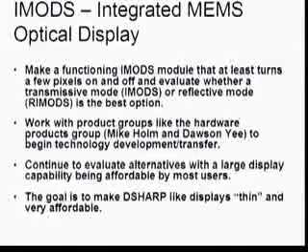And then the key after this is to tile them seamlessly, and that again is an optics problem. And rather than getting into that, I'm just going to point at Gary and say, ask him. He'll tell you how to do it. It's not insurmountable. So this is a new approach. It's as much an economic model as it is a technological model.

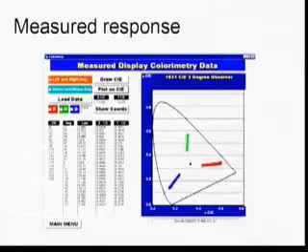You can't trust what people tell you. You have to go back to ground truth. Again, looking at the hardware, picking the hardware to pieces, getting into the internals of the hardware, that's what we do. That's part of our job. We were very lucky. There's other things that people don't realize about currently available display devices.

Until you measure it, you might assume that the gamut of the display is constant across all brightness levels. It's not. Here you see the gamut migrates to a smaller region as the brightness increases or decreases. This is actually, I think, with angle. Oh, I'm sorry, with angle. Right, this is not the brightness variation, it's the angle variation. The gamut shifts as a function of angle on these.

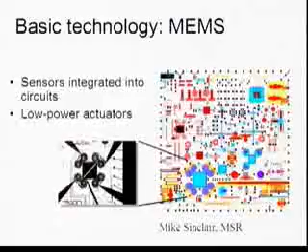It's something that we have no way of compensating for, by the way. We don't track the viewing angle; it's an unsolved problem as to how to optimally compensate for a wider range of viewing angle. But at least we know that there is this variation that has to be dealt with. It's very valuable to be able to get at the ground truth on that.

Now I want to go back to Anandan's questions. Portrait display devices are becoming more and more fashionable these days. So the question is how does ClearType deal with portrait mode displays where the stripes in the LCD pattern become horizontal instead of vertical? You can still use it. It doesn't give you quite the benefit that you would expect on Roman text, which is dominated by vertical stripes. But you can still use it, and you still get some increase in apparent resolution.

And it looks a lot better if you anti-alias than if you don't anti-alias. And one of the benefits of ClearType has been to focus attention on the quality of the anti-aliasing, not just on the displacement of the filters. So I'll give you a quick answer. If you have an option of turning ClearType on or off in a portrait mode display, turn it on.

Even for the rotatable stuff, although it may be different tuning. There is tuning available. The tablet people have a different set of parameters to use in that mode. Now, whether they account for being able to rotate dynamically, I don't know. You'll have to talk to them.

Okay, so this is phase 2. I'm trying to transition from the display devices into the mechanisms that can be used in display devices. MEMS are not just for display devices. They found a tremendous amount of application in display devices in their early use, but there are all kinds of ways to use it. This is a basic technology. It's a lot like when transistors came out, people didn't say, oh, this is all about radios, or hi-fi, or missile guidance units. Transistors are basic technology. That's the way you actually build electronics.

Now, there's another way of doing this, which is a little closer to the standard type of silicon processing that we're used to. Keep that example in the upper right in mind and think in terms of this region right around the hub, because we're going to go through some detail on the steps that are necessary to build this. So, number one, you start with a silicon wafer. This is standard, monocrystalline silicon that you use for any kind of IC fabrication. In fact, the steps we're talking about are precisely IC fabrication steps. It's just we're going to do some funny stuff in the middle.

So the first thing you do is you put on an oxide layer. Again, you just sit there and diffuse, turn up the heat, put in a little bit of gas, let it diffuse in for a while, build up this first oxide layer, take it out. You can etch that oxide layer, same old lithography steps that you would use anywhere. Again, this projector is showing it and this projector isn't.

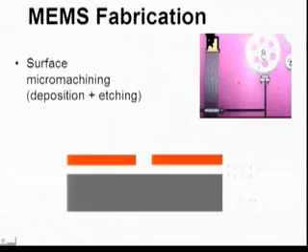Next step, go in and deposit polysilicon. This is not the monocrystalline substrate. This is a standard amorphous silicon layer on top. You deposit that. Notice that the deposition is conformal, that it doesn't exactly give you a layer that goes straight across. It actually dips down into the holes that you created in the previous step. You can etch that. Again, same type of photo etching that we do in standard CMOS processing.

Next step, go in for second oxide layer. Since this is the diffusion process, Mike will have to explain to me as well as you why it's conformal. But assume for the minute that it is, and again, you might not care, so we'll just gloss over that and go to the next step where we etch through all the way to the bottom, which is legal in this process, I think. Okay. There are rules you have to follow, by the way. If you're really clever, you can break the rules. Mike breaks the rules.

Last thing you do, well, not last thing you do. Next thing you do is lay down another layer of polysilicon. This again is conformal, and you can see it really gets down into that. It goes all the way down to the base silicon layer to form a post. Etch away. Now, what you end up with is a bunch of layers of oxide and polysilicon, just like you would in any CMOS process.

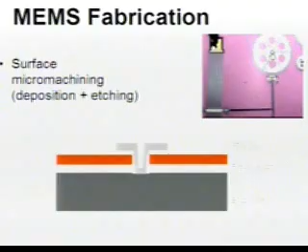What's the size of the wheel? What's the diameter on the wheel? 200 microns. Is the wheel the red layer? The wheel is the red layer, yes.

Okay, let me back up a second. The process, we don't do this in-house. We sit down, or Mike sits down at a CAD station, generates the design, emails it to a place called Cronos, which is a division of JDS Uniphase. They go into an obsolete CMOS line, which isn't much good for anything except MEMS.

And they will build him a 1 centimeter by 1 centimeter playpen. It's like you have this much real estate, you can put any kind of amusement park rides you want in that 1 centimeter by 1 centimeter piece of silicon. They will go through and give it back to you either released or unreleased, and most of what we've gotten back has been released,

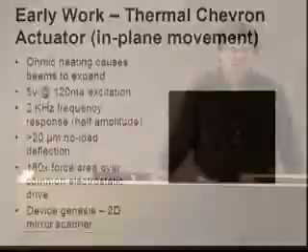but it is not mounted on any kind of header. It's just a little bitty chip of silicon that comes back, and Mike puts it into a probe station and starts exercising it. That's the process we go through. It takes 6 weeks, which is kind of frustrating. If you were writing software and it took 6 weeks to compile, you'd be really upset.

Nevertheless, there are a great variety of things that can be done here. Most of the research that Mike has done so far has been on novel low-voltage actuators. We have a low-power and portable frame of mind in our group. So whereas a lot of stuff you see in the industry is electrostatic, high voltage, ours is low voltage.

Yes? Are you by any chance trying to show us the video? Okay. So if you can look on... No. Okay. Alt F7? Or whatever it is you toggle your laptop display. If you can blank your display, we'll see the video. Let me blank my display so you can see the video. I'll be darned. Rick gets the door prize for today. That's been driving me crazy ever since I set up.

This is the video. Did you miss the other videos? Never. Okay. This is a thermal actuator. You notice there are a bunch of these ganged together. You gang them together, you get more force than you'd get out of any single one of them. And the 2 kilohertz response is, you look at it and you say, how in the world will I get something mechanical to run that fast? And the answer is, it's tiny. It's really tiny.

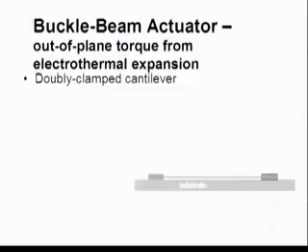Now, some of the principles behind this, let's look at how you build that kind of buckle beam actuator. It's real simple. You build a thin layer of polysilicon in this case. It has to be a conductor. Silicon dioxide, any of the oxides are not conductors. Polysilicon is a pretty good conductor. Not as good as the gold that's layered on top of it, but still a good conductor.

Run a current through it, and what happens is you heat it up and it expands, and it doesn't have anywhere to go since it's anchored on the end, so it buckles. And you get that displacement, and that's what you use as your force. You gang lots of those together, and that's how you get the kind of force you need to move mirrors around.

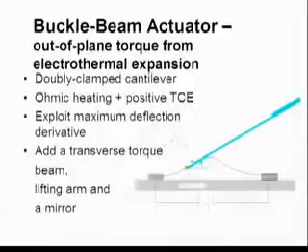There are other things you can do. If you're going to extract force from this, extract it off the point of maximum deflection, or in this case, Mike wants to get torque out of it, so you want the maximum slope to extract torque. And that point occurs at about 1/4 of the way in from the end. And at the point you want to extract the torque, you put a lever.

And if you put a mirror at the end of that lever, then you begin to get the idea of how either that or it's a set of oars for a galley for ants. Your choice of how to use it. But the point is to extract torque out of that heating. Now, if you put some enhancements in there, you can get even more. You can do even better.

Enhancement number 1 is to put a spacer, that is a bump in this thing. That'll deflect it even more out of the plane. And as you saw in the fabrication explanation, you can get bumps real easily. It's sort of like when you make a bed, if you put a pea underneath it, you'll see a little bump on the surface.

Just using fairy tale analogies here. That's what you do here, but it gets exaggerated. And using that gives you the asymmetry that's necessary. Now, the other thing you can do is curl it even further out by using what's normally a detrimental effect, and that is that

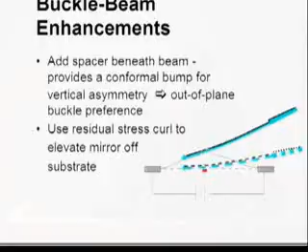if all of these layers, including a gold layer on top, are being held in place by the sacrificial layer, everything's flat. The minute you etch away the sacrificial layer, any residual stress in those materials will be released. And in this case, residual stresses are pretty large, and you've got two dissimilar materials, so the residual stresses are going to bend, and that's exactly what happens in this case, and you get even more deflection out of the plane. So that's the kind of trick. These are a combination of tricks to get the mirror really far out of the plane of the substrate.

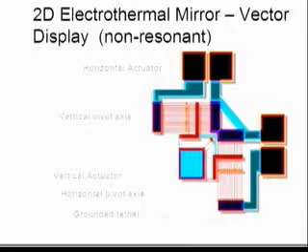Now, how do you build any kind of deflection, the mirror deflection system out of this? Well, as we saw before, you want to gang several of these, and just to get into the labels on which is which, I'm going to just put them all up there at once. Sorry. Quick explanation. Since you guys have had the benefit of the superior display down here, I'll give the explanation over here, just to even things out.

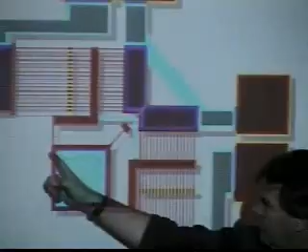Here's an anchor point. Here is that point of maximum slope. We've ganged together an axle, so to speak. It then goes to a lever and lifts that edge of the mirror. Same thing happens over here. It lifts this edge of the mirror. This is the axis of rotation. It's held down, clamped to the substrate. So now you've got an X control and a Y control.

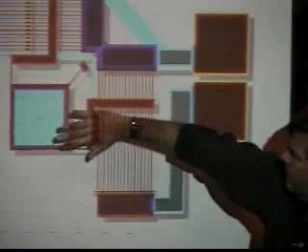You pass a current through here, and you heat this up, and it bends that way. You do the same thing over here. It heats up, it bends that way. And you do that in combination. You've got X, Y control over the deflection, and you can do the following. Here it is in action. As you can see from the label, that 0.2 of a millimeter reference, and the mirror is considerably smaller than that.

Down at the bottom, you shine a laser on the mirror. This is moving really fast, a lot faster than you see in the movie. You shine a laser on the mirror and deflect it onto a display screen, and what you end up with is a MEMS line drawing display. A very, very small line drawing projector that runs off of low voltage. Not necessarily low power, but low voltage. Something that you could put into a light pen. It's my favorite application.

Okay, go back to the iMods. You were asking about the modulators on the iMods. So here's an idea. If you go in and use that residual stress to curl a mirror up out of the display and integrate that in with the optics we showed. Now, this is not quite the same. This is not pass-through optics. This is folded. We'll take that original diagram, fold it, and use reflective optics.

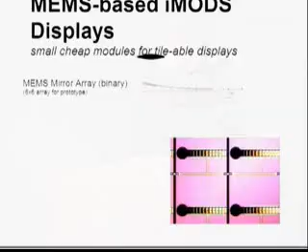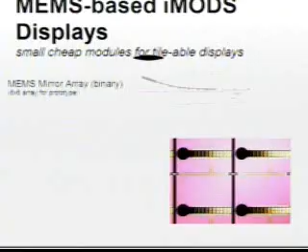And as you can see, let me just jump straight to the animation. You can see as the deflection changes that you're going to turn the beam on and off through a certain region. Did it show up over there? Good. If you missed it, we'll show it later over here. This is a recent prototype. It works fine. It's not fast enough for the types of displays we want to do.

There is something else pretty nifty in this, and I don't think we've exploited that nearly to the full extent, and that is to take advantage of mechanical hysteresis. Who was asking about storage so you don't have to move this as fast? Yeah. There is hysteresis in this process, mechanical hysteresis. That means that you could bend it and it stays sort of bent, and then you bend it back and it stays flat. And I like to think of that as the beginnings of a mechanical frame buffer.

Something we wouldn't normally think about in our electrocentric viewpoint. But, you know, the mechanism's there. The physical mechanisms are available. When you're doing this kind of research, you run across that kind of thing, and it starts your thinking to spin off into this different direction. I don't know how to use it yet, but I think it's a really nifty effect.

The one argument against this kind of mechanical things is their wear and tear over time and so on. What's the situation in the MEMS case about this? Some of the devices that you've seen wear pretty rapidly. Anything, the gears, motors, etc. They wear pretty rapidly. Some of these have very long lifetimes, and we don't know how long they are.

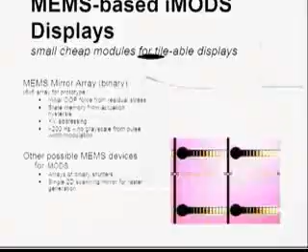When people want to do exactly what you're talking about, they will do the following. They will build up a standard microprocessor circuit, and they'll put one additional metal layer on top with a sacrificial layer underneath it, and they'll go in and pattern the top metal layer, which allows you to put in resonators and a few other simple things. In fact, this may actually qualify as the kind of thing you could put in the top couple of layers. And then they go out and etch that separately as a post-process.

So what they did was they took a standard CMOS process, got all of their circuitry into it, left the top unpatterned, went into a second process, patterned that for the mechanical devices, and now you've got the mechanical devices and the electronics integrated completely together on the same substrate. A few extra process steps.

There are some limitations on what you can do, and there are continuing limitations. In particular, that post-process has some temperature limitations. You do not want to exceed certain temperatures for fear of destroying the circuit you just built. But the simple answer to your question, yes.

Okay, moving along, I'm going to glide through this pretty fast. That's the sexy part, you know. That's using all the fancy microelectronics for sensors. There are some somewhat less exotic processes that we can use. My favorite is a spray can full of conductive paint. I can spray that on almost any man-made surface and create a capacitor, which then can be used as a sensor.

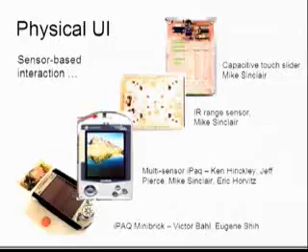So some of the examples that have come out of the lab have been capacitive touch slider, same principle that Mike has been working on. It's extraordinarily inexpensive to embed that in almost any piece of plastic you can think of, whether it's a tabletop or the side of your PDA. The IR range sensor is a way of getting 3D input with very inexpensive emitters and sensors.

Putting the accelerometers inside of the iPaq allows you to use tilt as an input, something that Ken and Mike and Eric and one of the interns published in a CHI paper. And then Victor Bahl and Eugene Shih, who is a former intern in this group, built the brick that goes on top of the iPaq, mainly for communications extensions. All of these types of things are the type of inexpensive and more conventional extensions that give us the richer UI that we're trying to get out of our experiments.

So what if we extend this completely off the desktop and completely away from these display-centered devices into just people? There's a big difference between a person standing in front of the display, and I don't care if it's a wall-size display or a desktop display or a handheld display, and a person just wandering around. A person just wandering around is of great interest because that person may or may not be busy, that person may or may not be in touch with people they need to be in touch with. There are all kinds of reasons for knowing what that person's doing and what their state is.

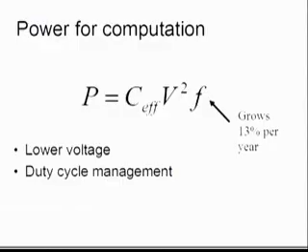Here is the math behind it. For those of you who don't know, this is about as simple as it gets. Power equals effective capacitance times the square of the voltage times the frequency of the clocks in the circuits. And this tells you why people have gone to lower and lower voltages in digital circuits, because that's a square term. Big wins to be had from that.

Now, if you decompose Moore's law into its components, you'll find things like shrinkage of feature size of 13% per year, which translates into an increase in frequency of 13% per year. And that means that for a given size circuit, we can run it that much faster and get that much more computation out of it.

Take the same argument and apply it to the area of the circuit. If you want to get the same amount of computation out of this block of silicon, you can shrink it by 30% per year, or 25 if you do the math a little more rigorously. But 25 or 30% per year. The same functionality shrinks year by year. It gets smaller and smaller.

Oh, by the way, if you're only interested in doing the same amount of work, shrink the battery voltage, shrink the effective capacitance, and let the frequency grow, or let the frequency stay constant. Your power needs are shrinking too. That's what Moore's law gives you. This is not the way Moore's law is presented to you in public. Moore's law says that if you really want to push the envelope, you can double your speed every 18 months, and then power ends up going up a little faster than that. This is the Moore's law side for small battery-powered devices.

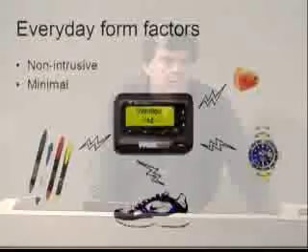There's a real win to be had there, and that's one of the things that we want to take advantage of. There are other things we can do, too, and that is managed duty cycle, which is just a constant term in front of that whole right-hand side of the expression, and that's something that we'd like to do. And that is an algorithmic exercise. Again, something that enters into our design.

When I keep talking about no geekware, the vision is to embed these devices into everyday form factors. If you're used to wearing something on your belt, put more circuitry into it. If you're used to wearing shoes, put circuitry into it. If you don't wear shoes, there's certain services that are not going to be available to you. That's not just restaurant service either.

Right. Can we wear shoes at the airport? Well, that's a good one. Let's not get into that. Right. This whole argument runs counter to certain trends. This is an old slide, and I haven't updated it for the past year. So, but yeah, that's a good point. If I have tiny little wires and a lot of piezoelectric film in my shoes, chances are I probably won't get on a plane.

That's no reason for us to stop doing research in this area, though. The fact is, we're looking for small modifications to everyday devices to do the work we're doing. Our first experiments in this area had to do with just sensing what the user was doing. Very simple. Put accelerometers in the shoes and have a little wireless hub. Now, a lot of us wear wireless hubs routinely. Some of us carry our wireless hubs in our pocket. Some of us wear it on our belt. If you keep it in your purse, that's a problem.

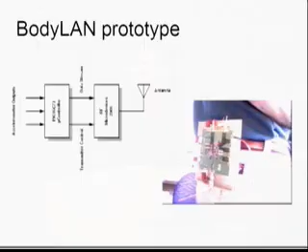There will be a talk at some future time about the social issues here. We're talking strictly about the electronics. We have looked more at sensor signal processing. We've looked at that with more success, mainly because it's a simpler problem. Let me give you an example, jumping ahead to the signals in question.

If I'm walking around and I have a heel-mounted accelerometer, I could take that signal and transmit it back to a server. And in fact, I could filter it to below, say, 30 hertz and not lose any of the information. It's a very low-frequency signal. I don't need Bluetooth for this, by the way. Or I could do something more clever yet. The question is, do I need that entire signal to tell the server what I'm doing?

On the other hand, if I want to uniquely identify the person walking based on their gait, which some researchers have done, then I need to send the whole signal back. To send the whole signal back, even though it has a narrow bandwidth, is going to require more energy than if I just send these extracted data.

A lot of the problems that we are trying to solve in the ubiquitous computing area have to do with trade-offs between local processing and remote processing, power and bandwidth, balancing them together. It's a partition that gives us the optimum use of these devices. That is a difficult problem, and it's something that we are trying to look at.